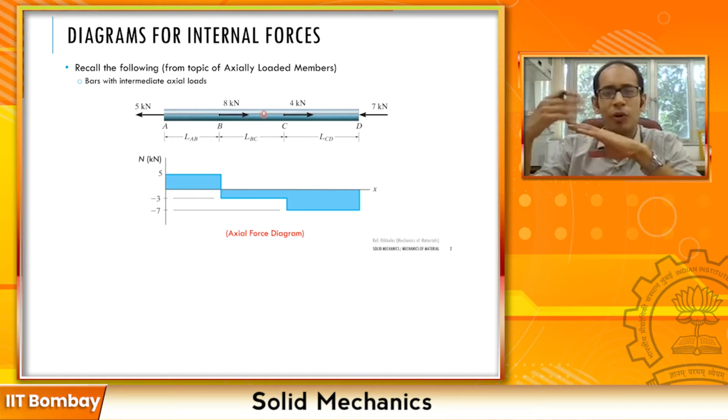But while solving this problem, while calculating the overall delta or whatever you want to calculate, remember that we had looked at each of these individual segments between the points of discontinuity of the force. We had drawn the corresponding internal force diagrams. So for example, suppose if I take a section and call this section 1, if I take a section here and call this section 2, and I can take one more section over here and call this 3.

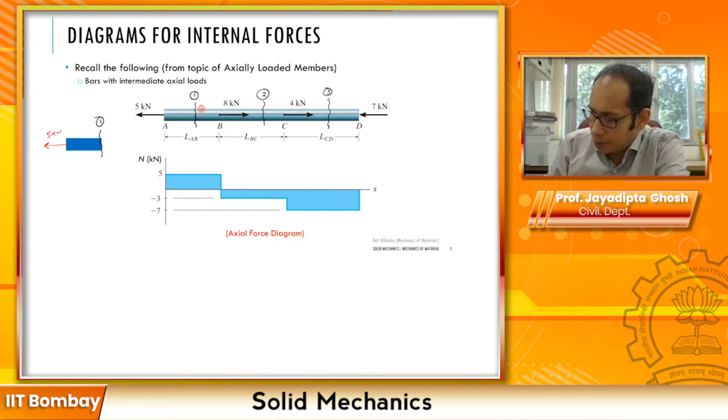Now for section 1, if you remember when we had drawn the free body diagram - this is the part, this is my section 1. Here I have a force of 5 kilonewton, so I am going to have an internal force in 1 as 5 kilonewton. If I draw the internal force in this segment from A to B, it is a tensile force, and for these internal axial loads, tensile is positive and compressive is negative - it's a type of convention. We had drawn this 5 kilonewton over here.

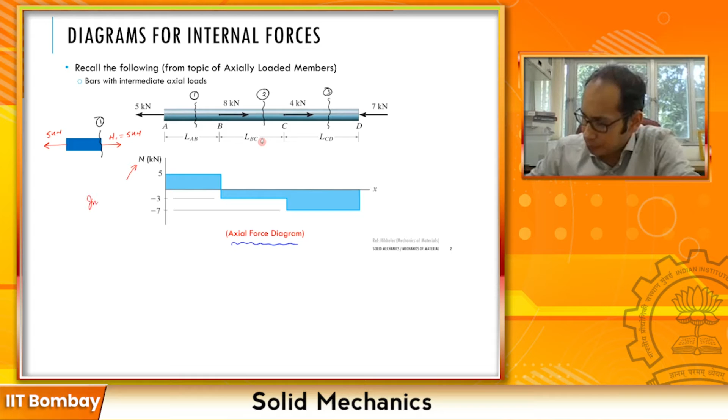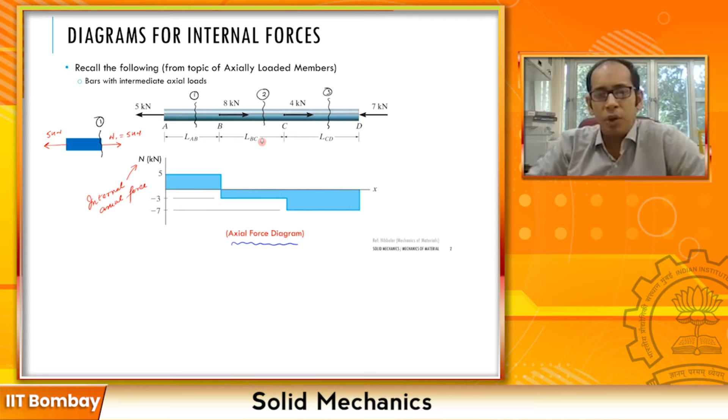Similarly, if you take another segment number 2, and draw another free body diagram from the left hand corner A all the way to 2, you will find that the internal force comes out as -3. We have done this in the chapter on axially loaded members. So essentially what we get at the end of the day is this axial force diagram - this is also a diagram of the internal forces. Remember, this N that you see here was nothing but the internal axial force. So we have already gotten a glimpse of how the internal forces vary.

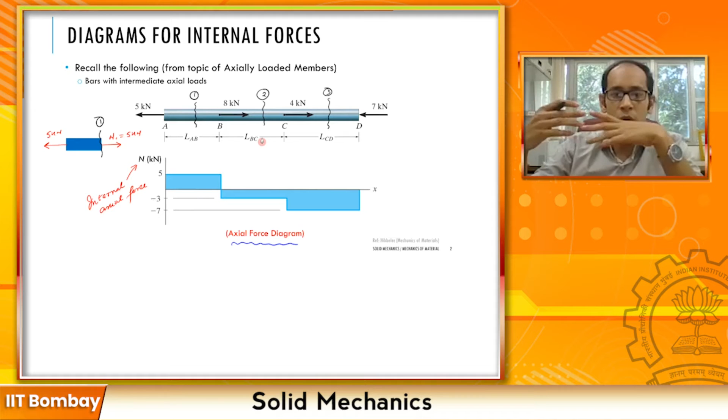Now, this is a bar which is under pure axial loading, although it's non-uniform. There are no loads which are acting perpendicular to the longitudinal axis of the bar.

So in essence, it is not functioning as a beam. Now, let me go ahead and present to you a beam over here. So this beam, as you see, it's a cantilever beam. It is clamped at this particular end.

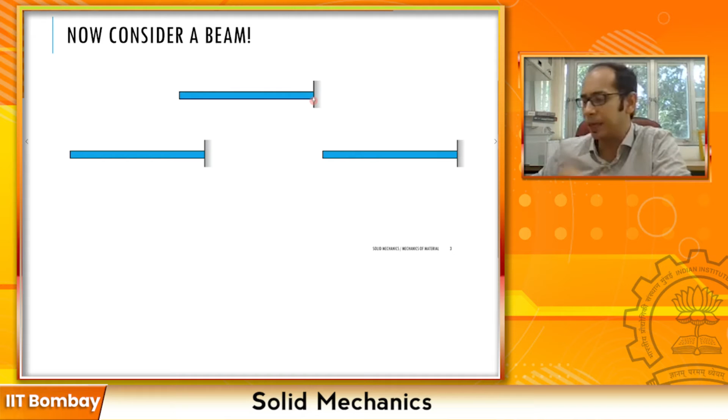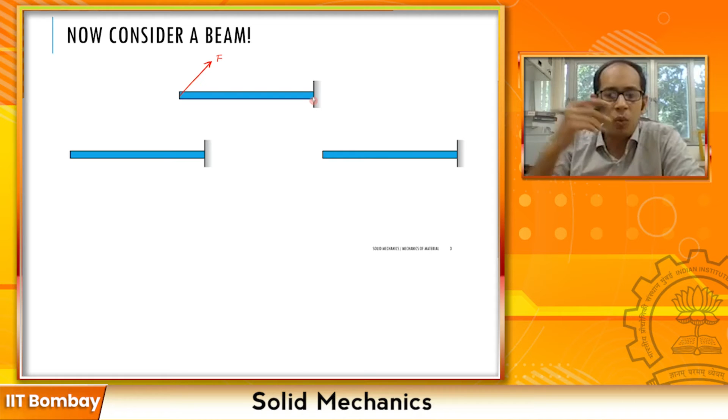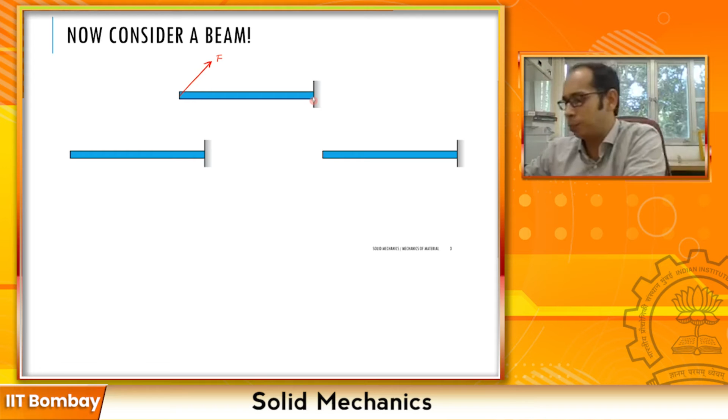Now, for this beam, if I apply a load, maybe about this particular direction, say I'm going to call the load F over here. Now, what kind of internal forces and internal stresses does this load impose? For this F, I can split into two components, one vertical and one horizontal. Let me go ahead and draw them. Suppose this is the vertical component and this is the horizontal component, and let me put names to them. Suppose this is my P and this is my Q over here.

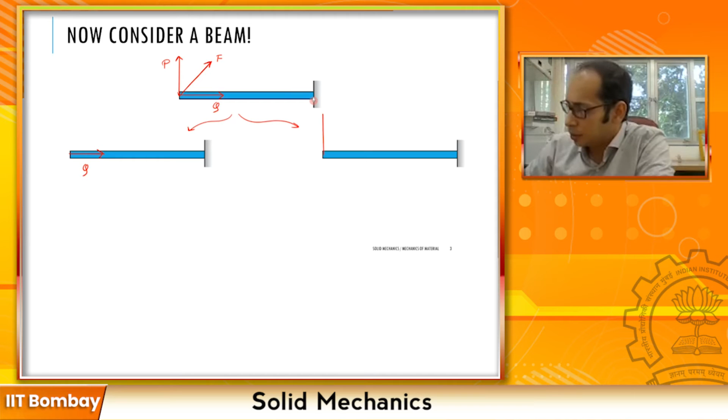Now, remember the principle of superposition. This force F, I split into P and Q. If I apply the principle of superposition and draw these as two different beams, then in the first beam I'm just going to apply the force Q that is acting, and in the other one I am going to apply the force P. Both of these together essentially give me my original loading over here.

Now, this is the case which we have already seen. We have seen that when you have a bar and you're pushing with a force Q, how the internal forces and internal stresses vary. So this is something which we have already done.

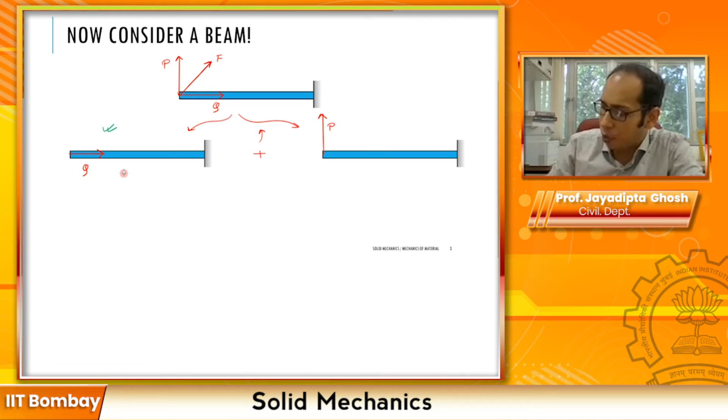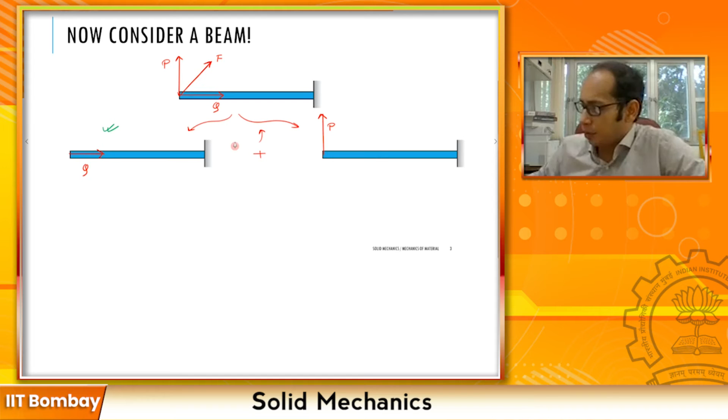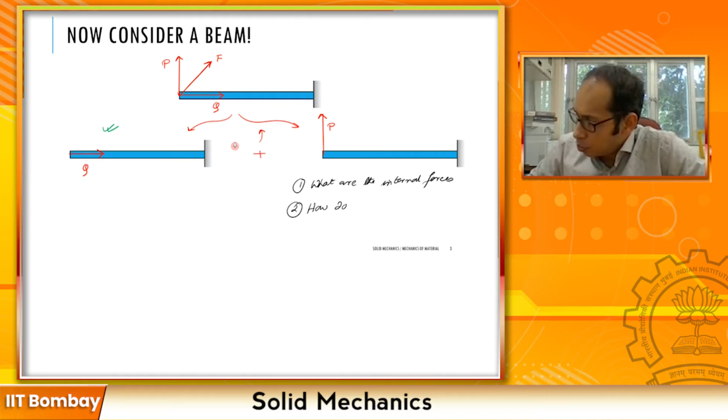Now the question is, for the right hand side beam, there are two questions. The first is: what are the internal forces? And the second is: how do they vary? We have not dealt with this case before. So for this load P, which is acting over here, I don't know how the internal forces vary along the length of the beam, and how do they vary over here.

So this is the intro that will lead us to the path of drawing the shear force and bending moment diagram. Since we have already looked at this particular case, and we are investigating what kind of internal forces this imposes, let's go ahead and solely focus on beams where the loading is almost always perpendicular to the longitudinal axis of the beam. Let's look a little bit more deeper into this kind of beam structure.

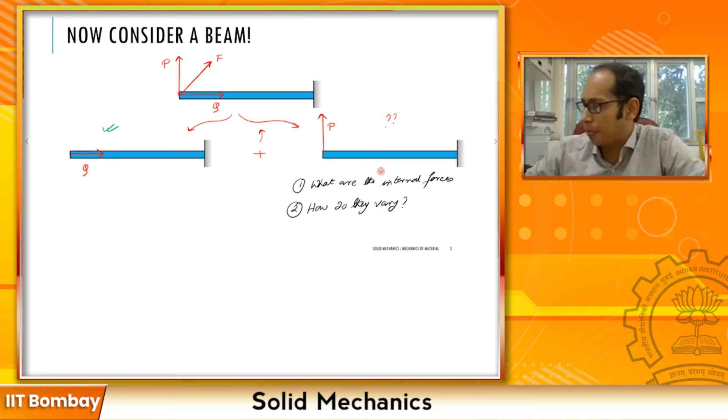Now, I'm going to present to you the same beam, A to B, as we saw before, and a load at the end, which is P, a vertically applied load. Now, similar to what we had done for the axial loading case, I am going to cut a section MN. So this is my section MN over here, where I've cut a section.

And I am going to do the exact same thing. I have a left side and a right side right now. So let me go ahead and mark that. This is my left side and this is my right side over here, and I have separated and taken my left side over here. And this is my right side.

Now, similar to what we did, all I have to do is figure out what are the internal forces which are acting just to keep these individual chunks in equilibrium. So when I am looking at my left chunk over here, at this interface, I can have three kinds of forces: a shear force acting vertically down or up, a moment, and an axial load as well. In this case, I'm not going to have any axial load because there is no force along the x direction that is there. If you are considering this as your x direction, there is no force in the x direction, so there is not going to be an axial force.

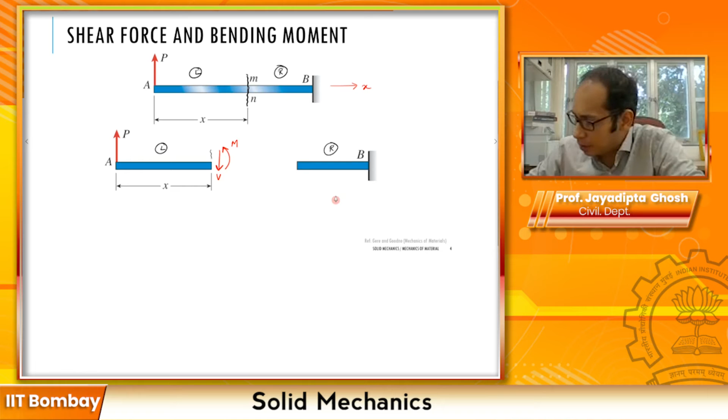So at that interface MN, the forces I'm going to have are something like this. I'm going to have a force V, and I am going to have a moment M over here. Now, since this section MN is the same over here and the same over here, let me further elaborate. This is the section MN and this is the section MN over here. When I'm looking at the right hand side, I must have an equal and opposite force V and an equal and opposite M acting over there, because that point is not going anywhere. That point is in equilibrium. So here also I will have vertically up V and a clockwise moment M.

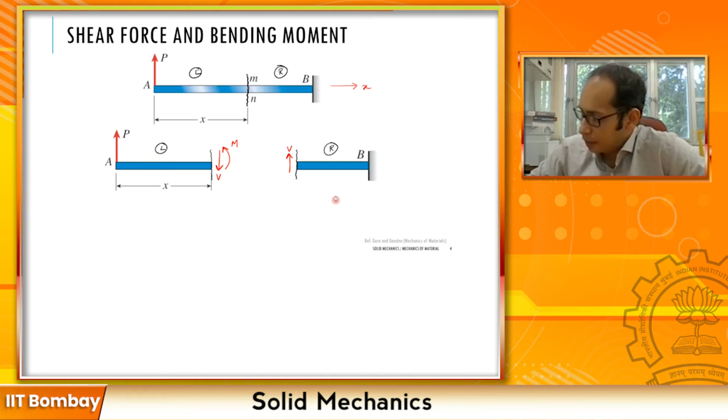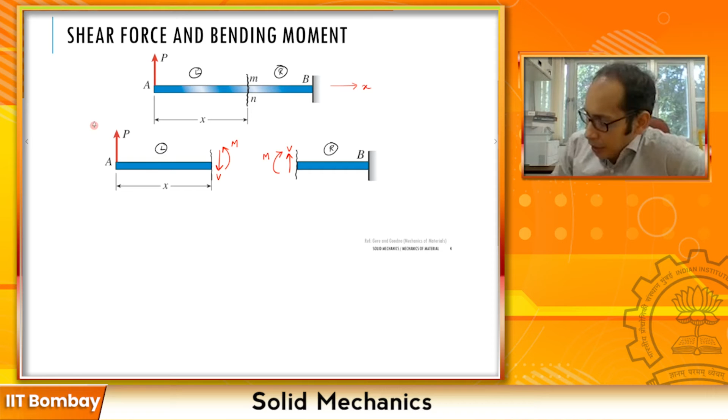Now, going from the perspective of pure establishing equilibrium, what do we get? From this particular portion, the left hand side, if I have to draw my V, if I am doing my summation of Fy equals to 0, this gives me my V as equals to P. So my shear force that is acting, V is the shear force. Let me write it more explicitly: this V over here is shear force, and this M is bending moment.

So my v is equal to p over here. And how do I find the moment? If I take the moment of all the forces about this particular section mn, I'm just doing moment equilibrium, so summation of moments must equal 0. That gives me p times x, because I've taken this section mn at a distance x from the left. P times x is a clockwise moment, plus v times 0, because I'm taking the moment exactly at this section, minus m, depending on what you take as positive or negative. This is the overall equilibrium equation, equals 0. So this essentially gives me that the bending moment at that particular point is p times x.

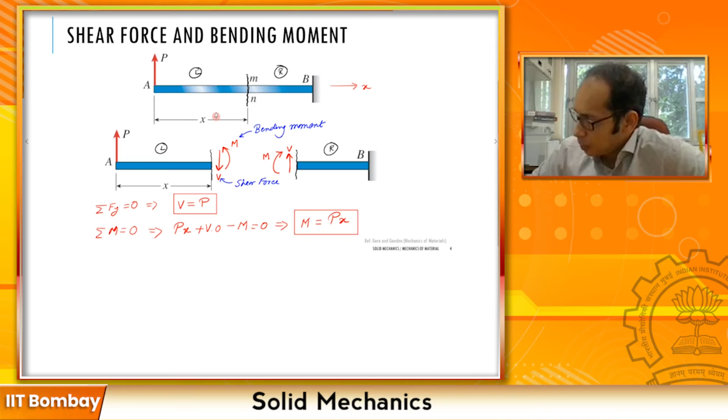Now try to appreciate what we just wrote. For this cantilever structure, when I have a load P at the left end, it does not matter where my x is, my shear force anywhere I take is going to be equal to P, because V is only dependent on P, it does not depend on x. Whereas the moment at any section depends upon the load P and also depends on the distance where you take that section. So it is P times X.

So this is a case where the shear does not vary as you go from left to right. Shear stays constant, and we will see this again when we draw the shear force diagram. The moment is a function of X, so the moment keeps on varying. The moment is 0 at this free end where x equals 0, and as you keep moving, the moment becomes a product of the load times x.

Now, will this be true for all kinds of loading cases, for all kinds of structures? Of course not. It is going to depend upon the nature of the loading, and it is going to depend upon the type of structure that we have.

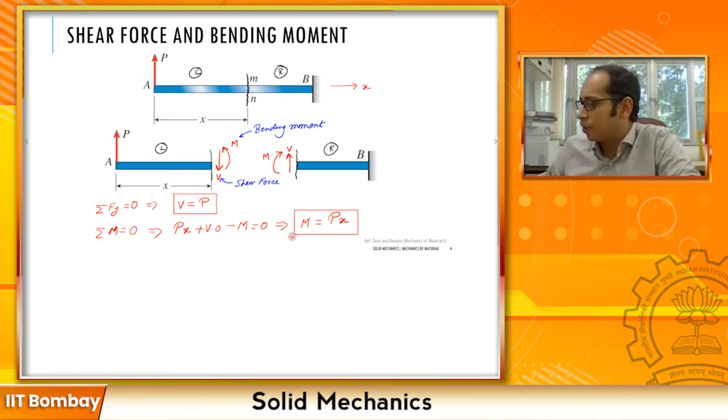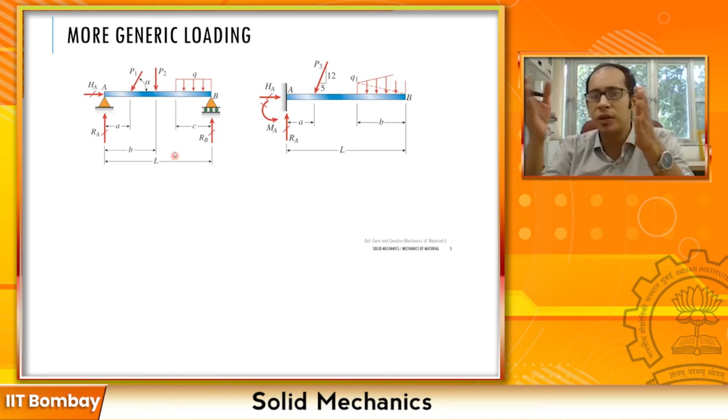For example, if I give you these generalized beams, maybe the left one is simply supported, as you can see, with different kinds of loadings: a vertically applied load and an inclined load. The one on the right also has an inclined load, a cantilever beam with a trapezoidal load. For these configurations, your V as well as M is going to vary along the length of the structure. It's not constant anymore. Neither V nor M is constant, they depend upon the loading and the structure.

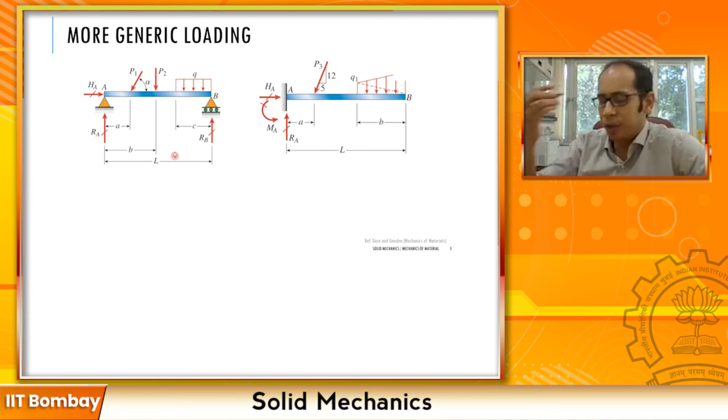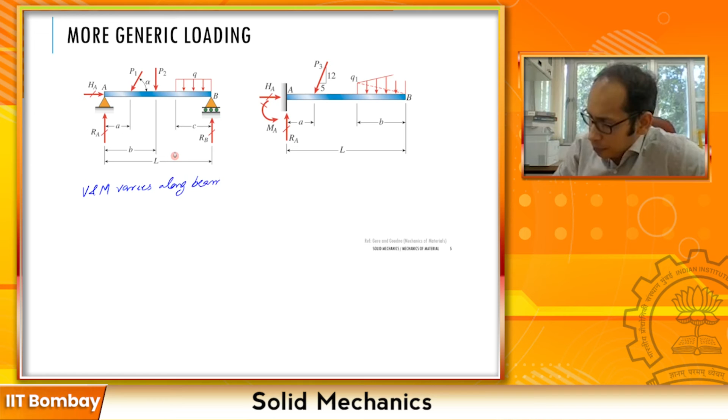So let's make a general note: V and M vary along the beam. It depends upon the nature of the loading and the type of structure that you have. So in a nutshell, the variation of V and the variation of the bending moment M.

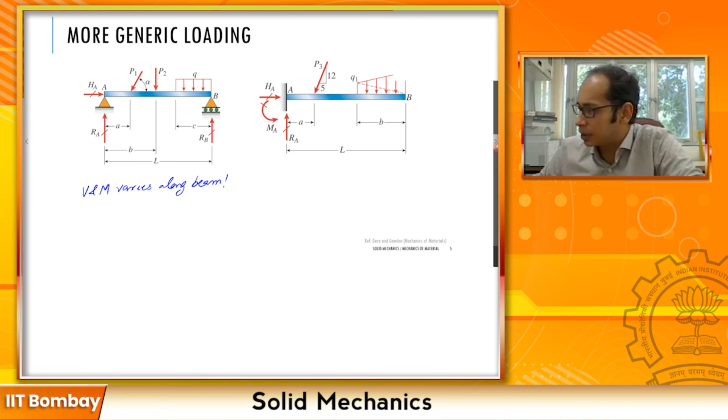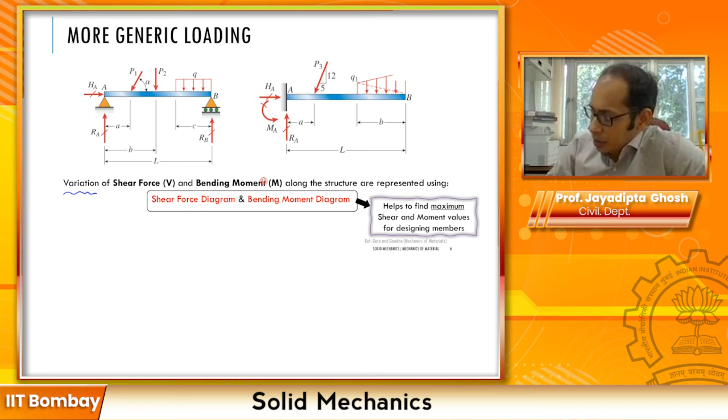How do you represent the variation? What we saw on the previous page is that the shear force and the moment vary, but how do we represent and capture that? The best way is to draw diagrams which show, from end A to end B, depending upon the loading conditions and the structure, how the shear force V and the bending moment M vary. This is important: the variation of the shear force V along the structure is represented by the shear force diagram, usually termed by the acronym SFD, and for the moment we have a corresponding bending moment diagram, known as BMD.

Typically in short form, it is used to draw the SFD and the BMD of this beam with this particular loading. And why is it important? Why are we doing all this? Why are we trying to break our head and take a beam with loads and find how the shear force and bending moment vary?

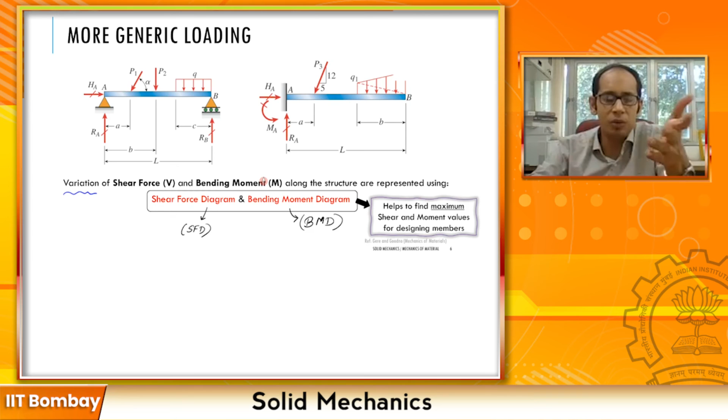Well, the critical point that you have to remember is that you design structures such that they don't fail at the points of criticality - at the points within your structure, the room where you're sitting in, the beams and the columns and the slab. The points along the beams are subjected to all the different kinds of loading, columns are subject to different kinds of loading.

The points within these beams and the columns and the slabs, if you draw the shear force diagram along the length of the beam or the bending moment diagram along the length of the beam, you will see that there are points where these values peak, these values become maximum. So if you had to keep on increasing the load, these points become prone to failure. So the shear force diagram and the bending moment diagram help you find the maximum values of the shear force and bending moment so that you are designing safe structures.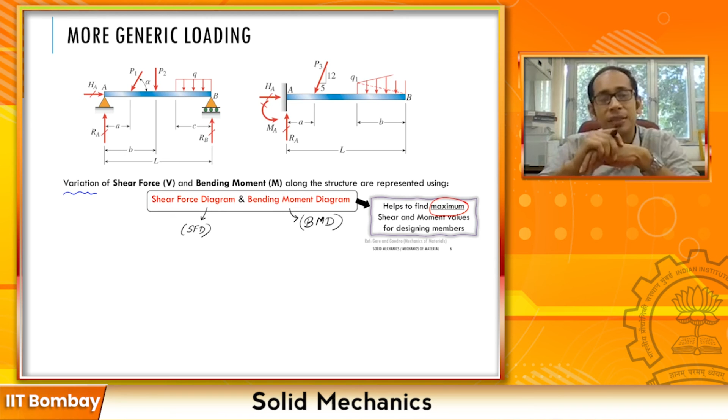And this is applicable for civil engineering structures, for mechanical engineering structures, for aerospace structures, and it has a wide range of other applications. So the whole objective of drawing shear force diagrams, seeing how the shear forces vary across the structure, how the bending forces vary across the structure in the bending moment diagram, is so that you are designing structures which are safe to resist the loads the structure expects to undergo.

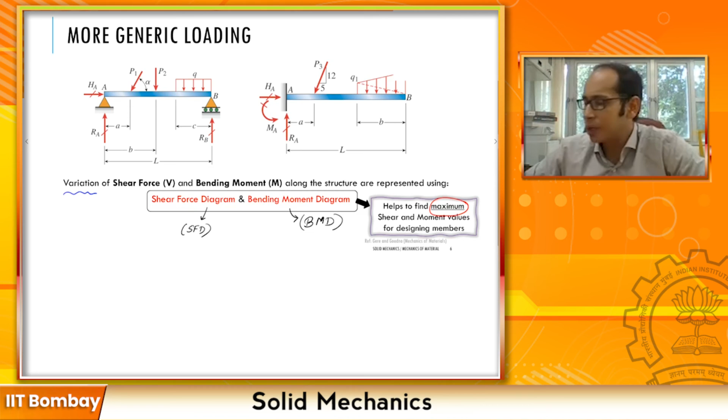Now, one thing which I want to bring your attention back to - we wrote for this cantilever beam, which we just looked at, with an end load P, we wrote the shear force V and the bending moment M. Now, what is the convention?

Remember, we always have to deal with some conventions so that you and I are talking the same language. What's positive to you may be negative to me, but we have to have one convention so we understand each other. That's the whole point of having conventions anyway.

Remember that in axial loading, we have also followed one convention: if the bar is under tension, that's positive. Probably you followed the same convention when you studied trusses in engineering mechanics - if the truss member is in tension, it's positive; if it's in compression, it's negative.

For the shear force and the bending moment, there are also conventions. For example, if you take a look at this beam, you see that this section MN could have been cut going from left to right or from right to left. When I cut this section from left to right, I have this V pointing downwards, M here, and at this point you are going to have an equal and opposite force. So what is the positive convention for a positive shear and a positive moment?

Well, the positive convention for shear is that if the shear force is trying to rotate your element in a clockwise manner, that is called a positive shear. Take a look at this figure - this force V over here, if this is your element, this force V tends to rotate the element in a clockwise manner. Similarly here, this force V also tends to rotate the element in a clockwise manner. So a positive shear is the one which tends to rotate your element in a clockwise manner.

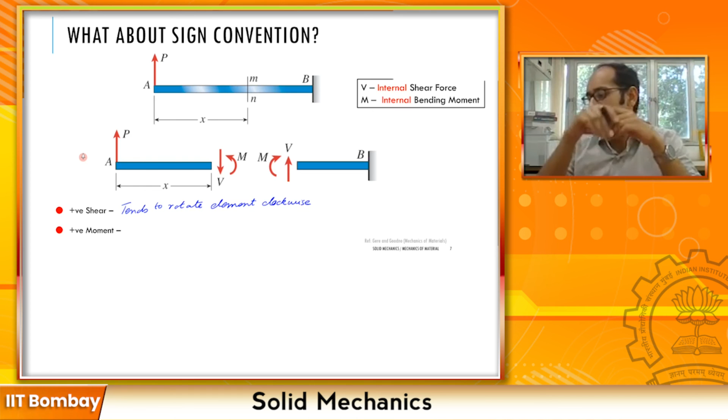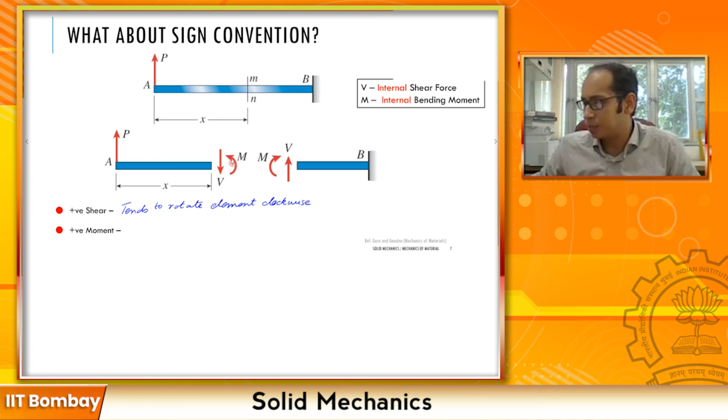And what is a positive moment? Well, the moments we have drawn here are also positive, so that probably gives you a hint of what we mean by a positive moment. A positive moment is the one which turns your beam into a trough, or causes sagging. What I mean by that - if you consider this moment M over here, what it essentially does is make your beam curl upwards.

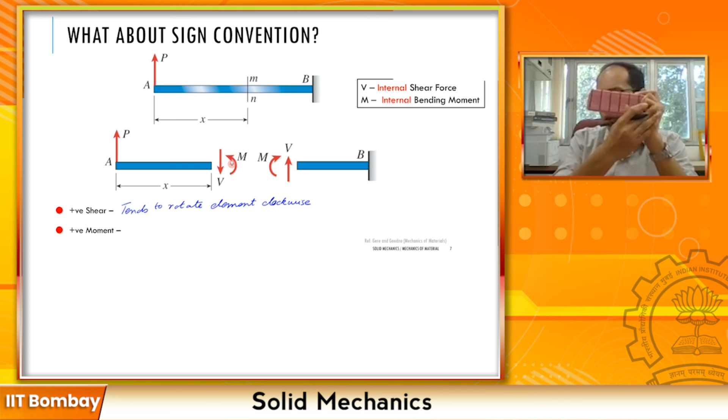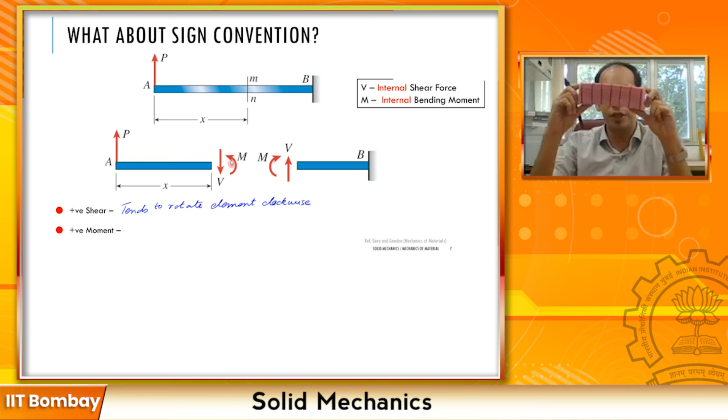So if this is my end A, this moment over here is trying to sag - it is causing a sagging of the beam. There are two kinds of phenomena: this is called hogging, and this is called sagging.

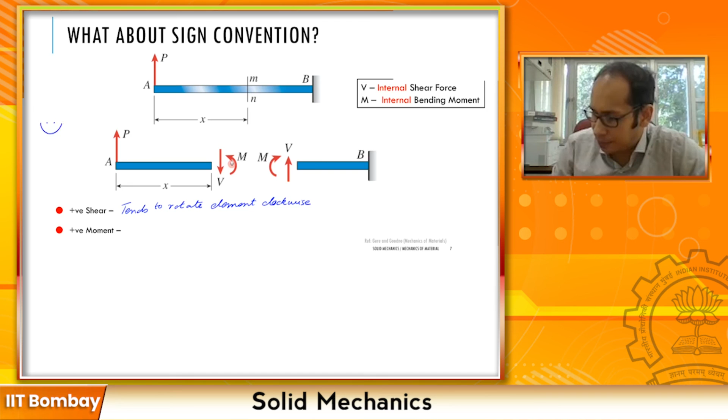So the easiest way to remember is that sagging is the smiley face. So if I have to draw this, this is my sagging - sagging means a smiley face, and a smiley face is a positive thing. That's the best way to remember the positive convention for a bending moment.

So this bending moment over here tries to turn my beam into a trough, causing a sagging kind of phenomenon. Similarly, this bending moment over here, the equal and opposite one which is acting, also tries to convert your beam into a trough. So in this particular case, if this is my clamped end B, I'm also having a sagging kind of moment over here. So a positive moment is the one which tends to...